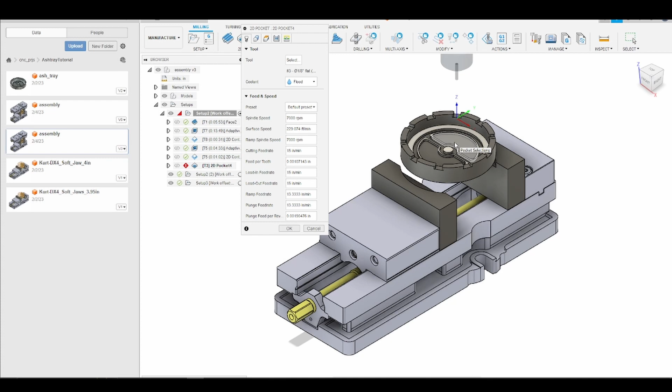The primary source of concern is my tool is long and skinny. It's 1/8 inch diameter and the flute length is 750 thousandths, and we need that long flute length so we can get over the sidewalls of the ashtray and remove material from the outline of the Pokeball. So there are two problems with that. One, I'm worried about deflection, so if I move too fast we can end up with deflection issues. And two, if I try to take off too much material, I'm afraid I could break the end mill.

So for our speeds and feeds, we're going to be at 7,000 RPM. We're going to be moving quite slow at 15 inches per minute, and our feed per tooth is right at 1 thousandth.

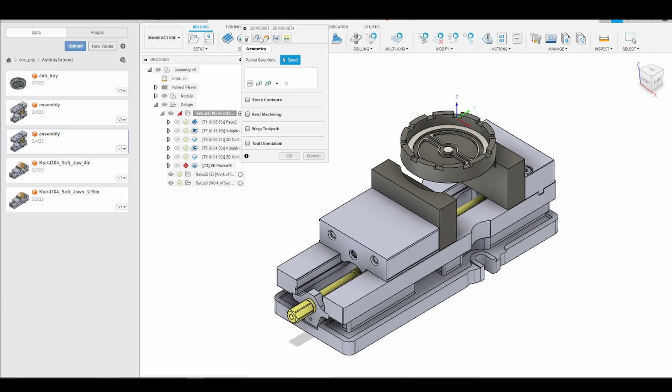Okay, so now we'll get into geometry. We're going to select the upper and lower portion of the Pokeball as well as the outline.

Now we'll get into our heights. We've already removed all of the material from the top of our Pokeball, so I'm going to set this to Model Top. I'm then going to go to the Passes tab. The first thing I'm going to change is the maximum step over, making that 50% the diameter of the end mill.

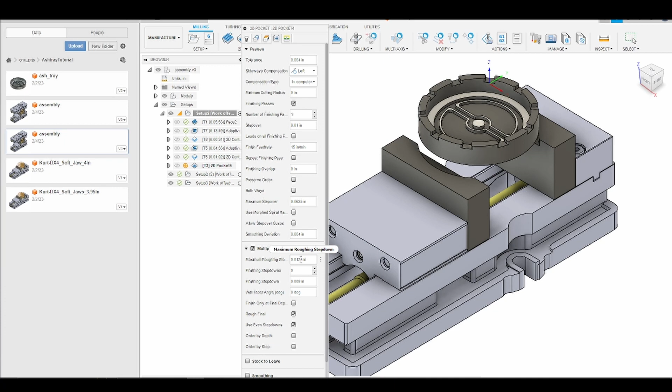I'm going to enable finishing passes, and I want my finishing pass to be at a 10 thousandth step over. I do not want to leave any stock. However, I do want to go in multiple depths, right? I don't want to try to slot the outline in one pass and break my end mill. So I'm going to change my maximum step down to 30 thousandths.

Okay, and then I'm going to enable smoothing and feed optimization. Compensation type in computer is fine. I'm not worried about holding any sort of tolerances, I'm just going to fill the Pokeball with epoxy resin. I'll now go to the linking tab and change my lead-in sweep angle to 45 degrees. And I will press OK.

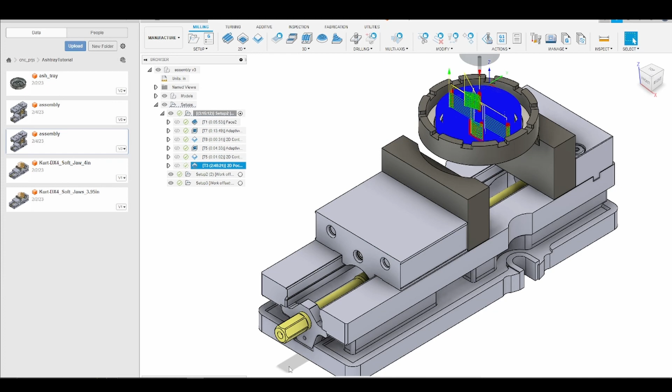All right, so Fusion generated the toolpath rather quickly, but you'll notice we have a major problem. Our estimated time is 2 hours, 48 minutes, and 21 seconds, which is insane. So we need to fix this.

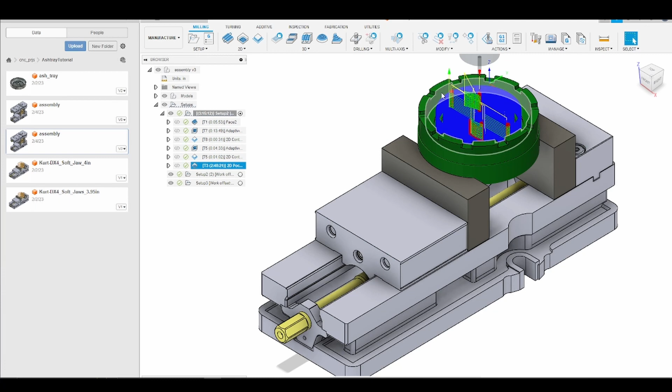This is a good learning opportunity. If we examine closely, we see that the issue is we are cutting a lot of air, and that's because we chose our top height to be model top. So what I'm actually going to do is, if we look at our stock left from our previous operation, you'll notice that the upper and lower part of the Pokeball have already been roughed out, but the outline has not.

So what I'm going to do is split this pocketing operation into two toolpaths. I'm going to right click and then go to duplicate. What we're going to do is make two separate toolpaths to take advantage of the fact that we already roughed part of the Pokeball.

So the first thing I'm going to do is open up the first pocket, and we are going to go to our geometry. We're going to clear our geometry, and we're only going to select the upper and lower halves of the Pokeball. Then we're going to go to our heights tab, and here's where we fix the issue where we were cutting all that air.

Instead of our top height being model top, I'm going to go to selection, and then select the floor of either half of the Pokeball. The next thing I'm going to do is go to linking, and we can save some time by changing our ramp clearance height from 100 thousandths to 20 thousandths. That just means we start 20 thousandths above our stock as we helical into the pocket. And now I'm going to click OK.

And you'll notice our toolpath is now 4 minutes and 32 seconds, which is much better, orders of magnitude better than 2 hours and 48 minutes.

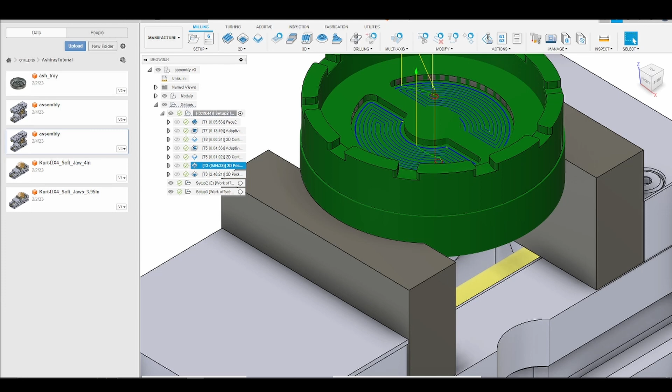So now what we'll do is go into our second pocket. This is just a duplicate of the first. We're going to do the same thing. We're going to go to geometry, clear our geometry. However, this time we are going to select the outline of the Pokeball.

And then in geometry, instead of model top for our top height, we're going to go to selection. Remember, the outline has not been roughed. It is basically solid, there's been no material removal. So I'm just going to select one of the upper surfaces.

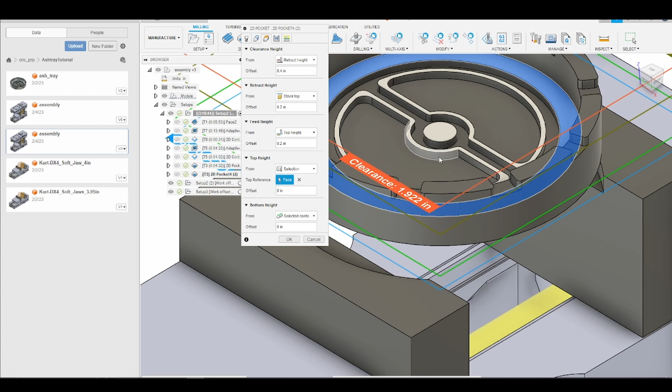And then we will again go to linking, and we will change our ramp clearance height from 100 thousandths down to 20 thousandths. Press OK. And that should do it for our two pocketing operations.

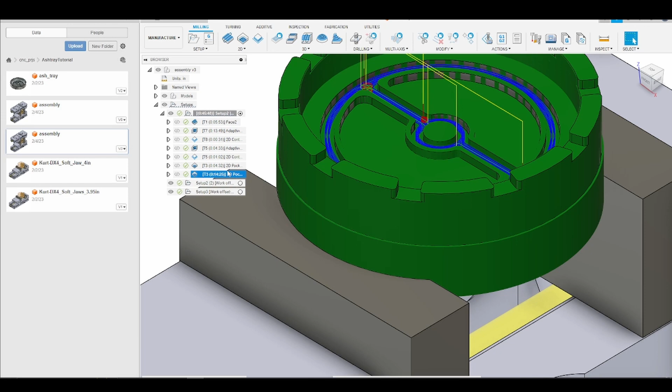And we go from, again, nearly 3 hours down to roughly, we'll call it 19 minutes if we were to add both of these toolpaths together.

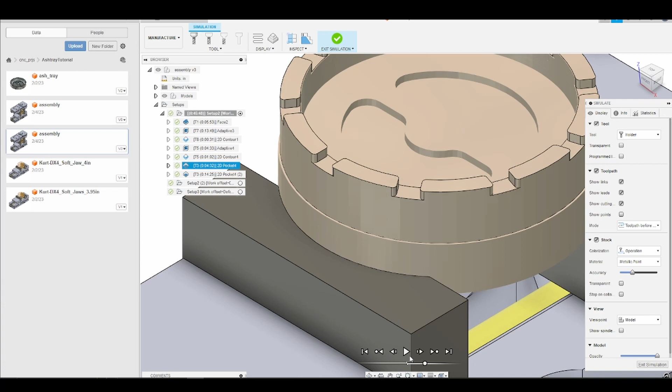That is far superior than what we originally had. Now we need to simulate each of these tool paths, since we changed our top heights. We want to make sure we don't collide with the side walls or any fixturing, which could damage our machine or break a tool. Let me zoom out a little bit.

You'll see we went right in and did a small helical entry about 20 thousandths above our pocket, then started clearing it, doing the same for both halves of the Pokeball. We'll speed up the simulation to get through it. Perfect, we ran into no collisions.

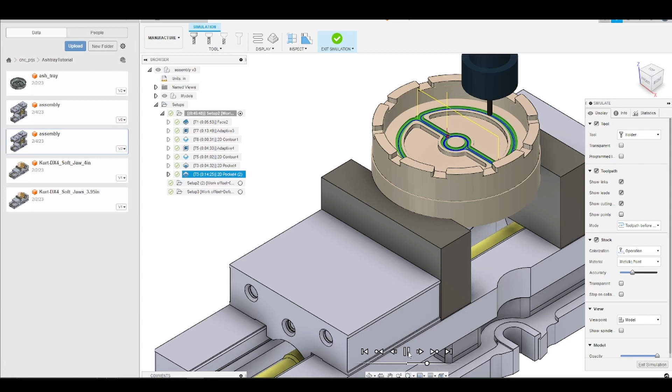Everything looks good, and now we'll simulate the second pocket. Again, it should follow the same approach: perform a helical entry and then clear away the material. This time we're going in steps of 30 thousandths, so we don't take off more than our end mill can handle, break the tool, or run into deflection issues.

This one takes a little longer, so I'll speed it up. That does it for our pocketing operation. We now have the outline of our Pokeball.

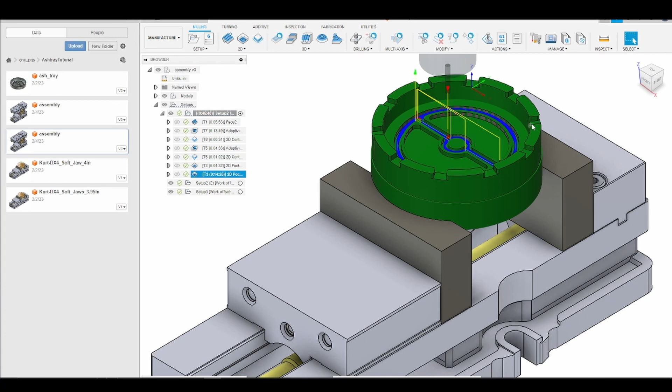The last thing to finish Op 1 is chamfering around the top of our ashtray. I'll go to 2D chamfer, go to tool selection, go to my Tormach library, and select a 1/4 inch chamfer mill. Select OK. We're running at 4,000 RPM, 20 inches per minute, giving us right around 1.25 thou per tooth.

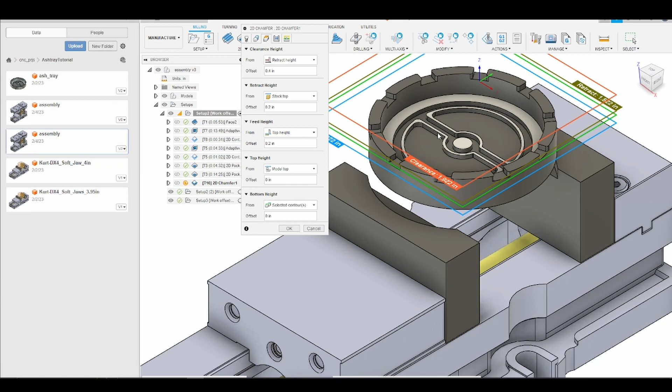For the geometry, we'll select all the contours around the upper portion of the ashtray. Now we'll go into our heights tab, and instead of stock top, I'm choosing model top because all of the material has been removed from the top of our ashtray.

I'll now go into the passes tab, and I want the chamfer width to be 15 thousandths. Our chamfer tip offset we'll leave at default, 40 thousandths. The tip of the chamfer mill is fragile, especially if it comes to a sharp point, so we want to move the tool away from the tip so we don't break it off and ruin our end mill.

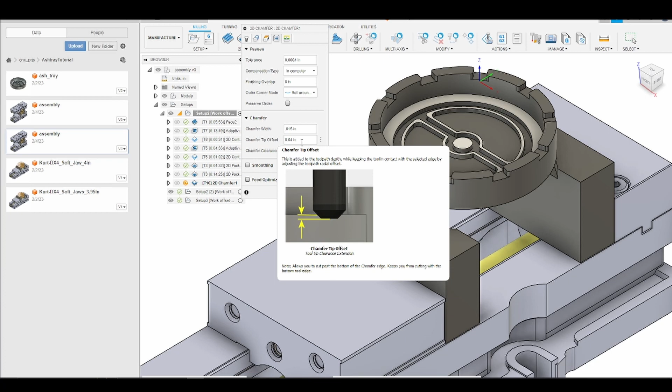That's fine. I'll go to smoothing and feed optimization, linking in 45 degrees again for the lead in sweep angle. I'll click OK, and we'll simulate. This is probably going to go rather quickly, so I'll slow it down so we can see what's happening.

We enter in and again chamfer around those top edges. Now another thing we could do, you'll notice we enter in the back of the ashtray. Some people may want to change where the tool enters, maybe they don't like the chamfer mill entering in the back where they can't see it.

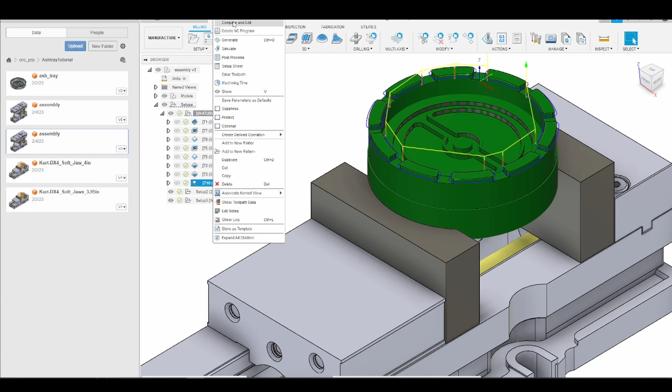So we can right click and edit the tool path, then go back to linking, select an entry position, and say I want to start here in the front where I can see it. We'll go ahead and click there.

Now Fusion will regenerate the tool path, and if we simulate, you'll notice we start at the front of the ashtray instead of the back. So if we were worried about a tight clearance window and wanted to make sure our toolpath was running fine and we weren't going to break our end mill, we can move it to the front for that reason.

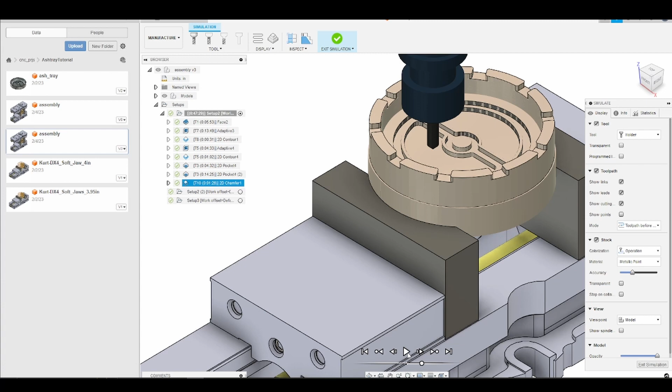We'll go ahead and simulate again so we can see that. We'll slow it down, and you'll see that our tool does indeed enter at the front of the ashtray, then we'll speed it up so we can see it performs the same tool path as before, finishing all those chamfers.

That does it for Op 1. We'll now get into the machining on the Tormach, and then in the next video we'll go over how I cleaned up the inside of the ashtray after I poured the epoxy resin.

Alright, so now we begin our 2D pocketing operation on the upper and lower pockets of the Pokeball. Again, using the smaller 1/8 inch end mill, we're going nice and slow at 15 inches per minute. The upper and lower portion of the Pokeball have already been roughed out, so we're just removing the 10 thousandths worth of stock on the bottom.

Now we perform the second pocket, where we're clearing the material away from the outline of the Pokeball. We're still moving slow at 15 inches per minute, however the outline of the Pokeball was solid, no material removed from previous operations, so our depth of cut is 30 thousandths. Again, we're taking it nice and slow to try not to break the end mill.